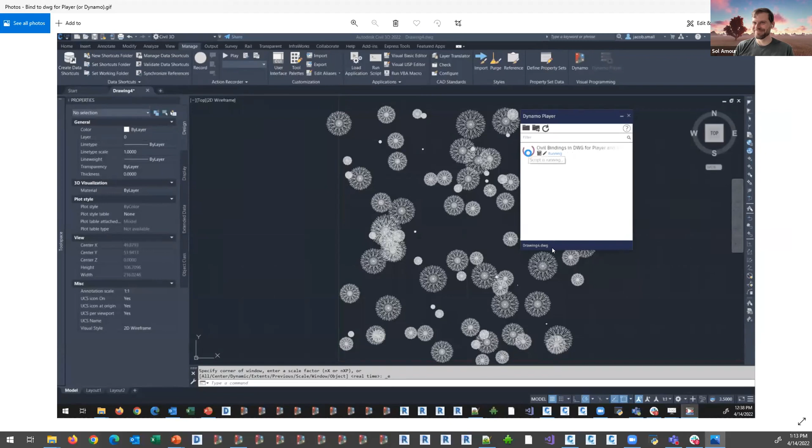So you can see I'm hitting run on that Dynamo Player graph right there, and it's updating the entire piece. This is what I get for copy, paste, replace image instead of copy, paste, and resize. In any case, every time I hit play, I'm getting a new set of trees in this animation. And that's because, again, the session trace data is being stored into the DWG so that we have access to it as the files may update.

This is really handy if you're ever going to automate creation of elements based on an external data set. Maybe you've got a CSV that has station offset elevation coordinates relative to your alignment that you're going to use to place all the utility lines. And then guess what? The spacing on those has to change. Well, we now have to change everything, right? Well, no, we just need to run that same DYN and get revised content, which is pretty cool. All right, back over to the PowerPoint and on to Sol.

All righty, thanks, Jacob, appreciate that.

And one clarifying point, Jacob mentioned two terms, element binding and session trace data. They are the same thing, essentially. So if you do hear or come across those terms, you can kind of pair them together. So moving on to transactions.

Is this GIF playing? Hopefully it is, maybe it's not. But basically, transactions are a way for the program, in this case, Civil 3D, to record actions taken inside of Dynamo. So transactions actually occur across all of the other features that you use inside of Civil 3D as well. But in the case of Dynamo, there's a couple of specific behaviors that exist.

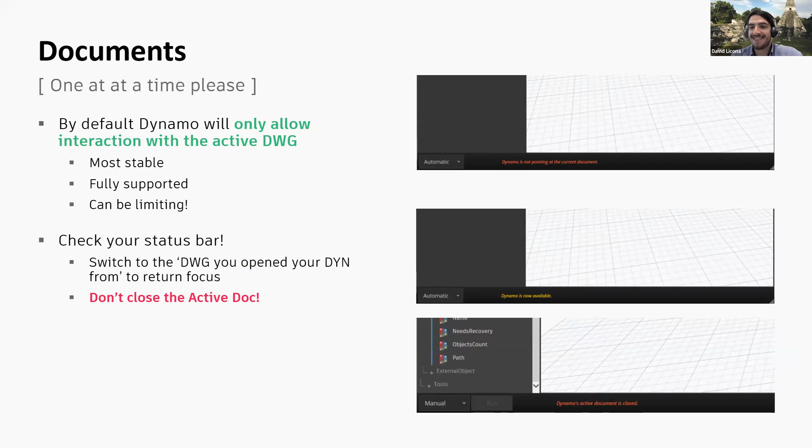You're on mute, Jacob. On mute, of course, because I'm having some technical difficulties. I muted myself and then forgot to unmute myself. Any case, we're here now.

Documents, one at a time, please. So by default, Dynamo for Civil 3D will only allow interacting with the active DWG. This is the most stable. It is fully supported. However, this can be a little bit limiting, right?

We all know that it's quite often the case that we want to modify more than one thing at a time. It's very common that we have multiple DWGs involved in a project. It's actually pretty rare that you would have one DWG for that entire tech stack, right? So if at any point you find you are locked up, you may want to check your status bar.

I've put a few of the more common messages related to document issues down there in the bottom. You can see down there on the right hand side. So this first message, Dynamo is not pointing at the current document. When you launch Dynamo, it associates that Dynamo session to that DWG, right? That Dynamo graph, that DYN, needs to be able to see that DWG as the active DWG in order to be able to do pretty much anything, even execute.

You can't even close that DYN once you start pointing at the wrong thing. To fix it, tab back into that previously launched DWG. Don't close that active doc though, because if you do, you're going to have to open it back up from scratch. You're going to get that grayed out run button that you see down there at the lower right-hand corner, where you're just going to be pretty much locked out. So keep that in mind.

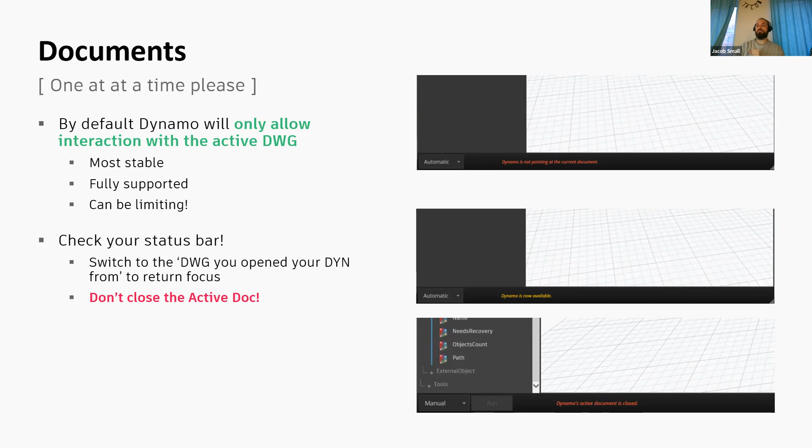Now, this is all sort of as designed, but that doesn't mean you are limited to only being able to work on those DWGs that you have open. This next slide, if my content is working, there we go, does show that it is possible to actually work with other DWG content. This is enabled by the Camber package right now. It's got some amazing nodes for background processing DWGs. Shout out to Zachary Jensen, who's the Camber package author, for providing this.

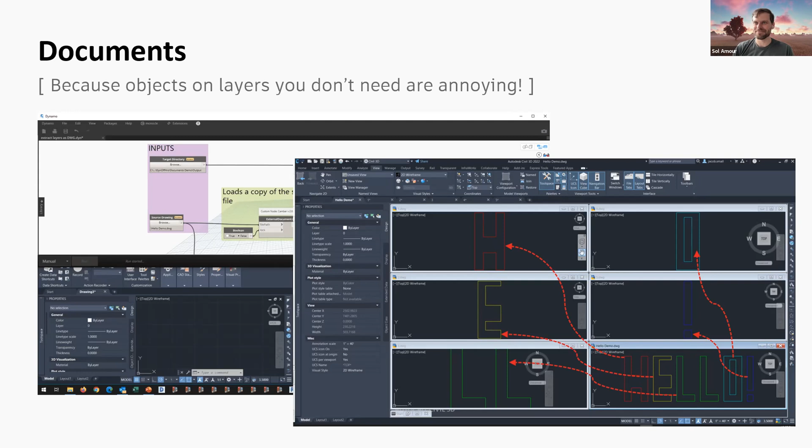Definitely room to improve in the future. We can look to try and improve the situation to get somewhat what you're looking for, Piotr, but that's the current state as it stands today. Great questions, by the way, both of those.

All right, so on to the next one. Yeah. Objects that update automatically. Awesome. So this is just a singular slide. It's kind of illustrating a little bit of a point around how Dynamo and Civil 3D operate together. So it's around these notions of listening and responding and updating to stuff. So Dynamo for Civil 3D listens for changes in the underlying document of Civil 3D through this thing called events. So when things happen, it's an event, and when that event happens, Dynamo listens to it, and then Dynamo can react and update AutoCAD objects.

So this is similar to some of the behavior in Dynamo for Revit. There's a handful of different nodes that will be listening to these changes in the background document, and that will automatically update irrespective of whether or not you click run on the graph. So there's a word of caution here: depending on each node's implementation, behavior can be a little inconsistent. So it's just more of an FYI so that you're aware that if something goes a bit funny, this is probably the action that has been taken in the background.

So one way to mitigate the issues that arise from this is it's always safest to run the graph manually as opposed to in automatic mode, because you do not inadvertently pull in any changes you did not want before you know what is going on. Caveat there, though, is I personally always play in automatic mode and just deal with the consequences if they arise. I find it a little bit more fun.

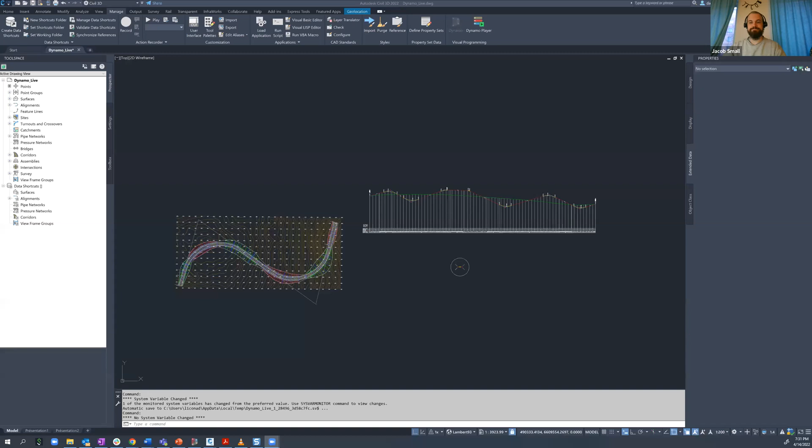Well, with that, that's the end of the slide deck. We're doing pretty good on time. David, that means you're up. I'm going to go ahead and stop my screen share so you can pick up with your demo. Yeah. So is my screen up there, all right? Yes. Cool.

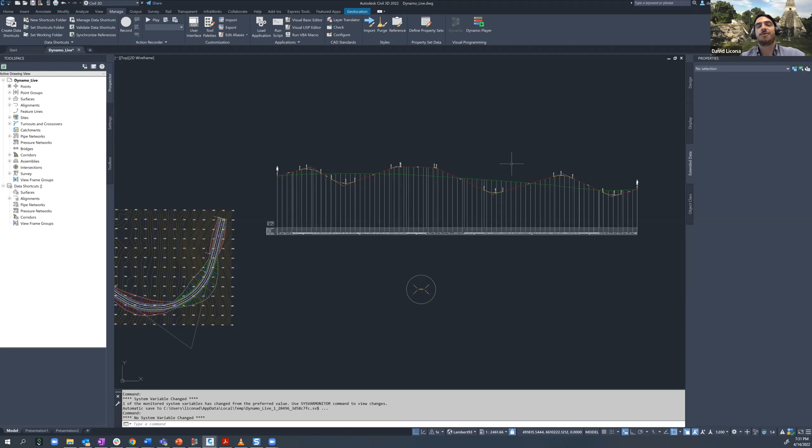Okay, so I have a really small file, and I tend to do this a lot. So this is my advice: have some test files where you can test stuff that are not huge projects. Start with a simple file, and this is what I have here. So I have a corridor. I did an exaggerated profile for the corridor here, just to have some cut and fill that we will be able to see easily. It actually looks like a road back in Guatemala, I think.

But anyway, what we'll be doing here is creating earthwork solids. This is actually a workflow I worked with, and I've seen a lot of interest around it. And afterwards, if we have some time, we'll see how to add some property sets. We have this property set already defined here that is called DynamoRules, right? So I'll jump into Dynamo.

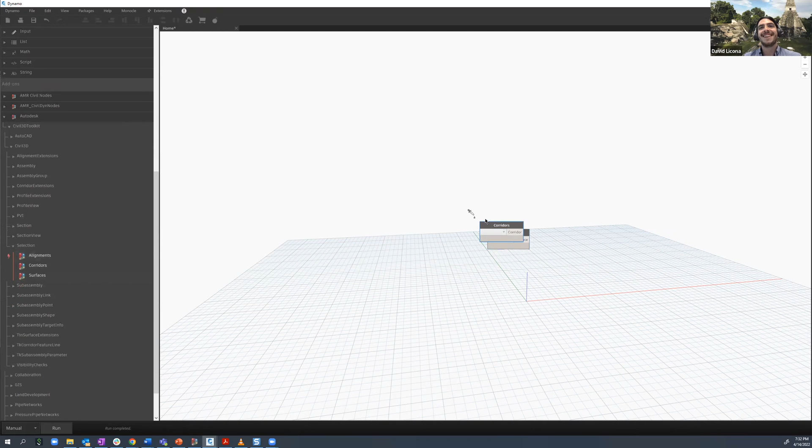Okay, so we'll start by selecting stuff from Civil 3D objects. I'll start with the Civil 3D Toolkit. In the Civil 3D Toolkit, you have some selection nodes here, and these are really great. Actually, Paolo built them. He added them to the Civil 3D Toolkit after I requested it for this specific workflow.

So I'll be selecting two surfaces. First, the EG, the existing ground, right? And I'll be copying and adding another, which is the project surface. So we'll be creating these solid objects between them. We have a surface extension node here that allows us to create the solids.

It's not this one. I always get confused. It's create solids at surface. Yeah. So we will take two surfaces and we'll be creating those solids between them. And this is really useful because if you know Civil 3D, you know that earthworks are only represented as surfaces. So afterwards, it gets complicated if you're going to do some BIM 4D or BIM 5D, for example.

So I'll just plug in. Sorry, I have some problem here. I lost my mouse. Yeah.

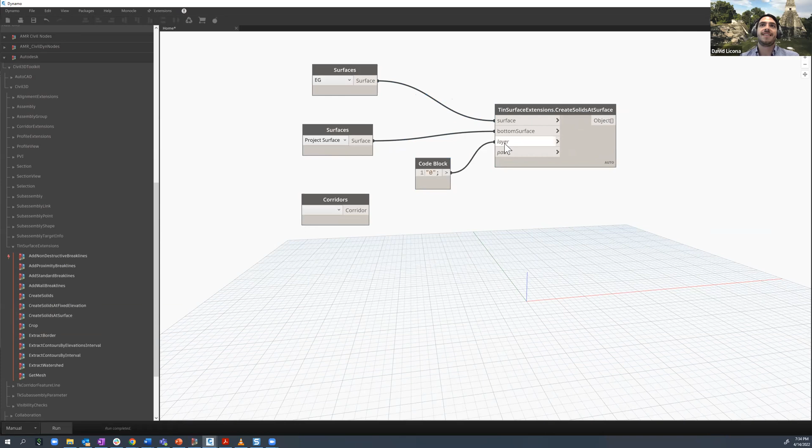Okay, and then I'll add these to layer 0 because afterwards I'll be deleting them, and you'll see why. So if you see here on the output, it will be creating objects. So it will be creating something directly on Civil 3D and not in the Dynamo space. Okay. So if I run it, it will take some time. You think nothing happens, but I have my solids here.

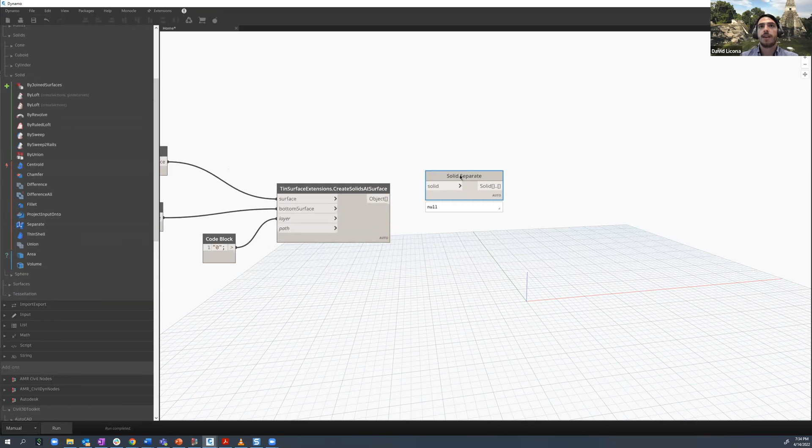Okay, and by default, what it's creating is one solid for the cut and one solid for the fill. So we'll be seeing how to split those. Okay, so this is something really cool in Dynamo. You have the geometry on the solids. You have some, I don't know the name, so that's why I'm searching here. Separate, yeah. So we can separate solids into individual solids if they are not joined together.

So this is what I'll be doing next. Okay, so just separating those solids. I'll run this. Oh yeah, sorry. I need to bring it before to the Dynamo space. I'm really sorry about that. So I'll take the object geometry. Okay, yeah. So this Civil 3D object, I need to bring it to Dynamo space to start splitting all my solids, right? So no big mistake here. Live demo. So there goes.

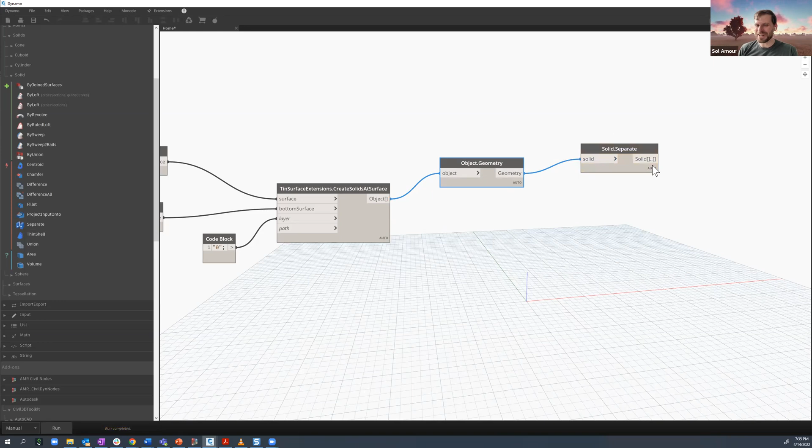Yeah. So as you can see, there are tons of solids created. And why is this? It's because sometimes here, when it's tying up, it's changing into cut and fill. So we will have these tiny lumps of solids that we don't really need. Okay, so we'll just inspect this with the solid volume.

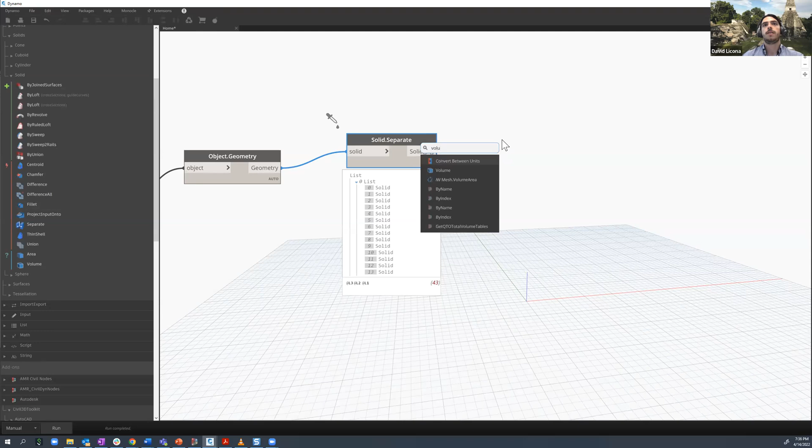And tell me how I'm on time, okay, guys, because... Plenty, so plenty of time.

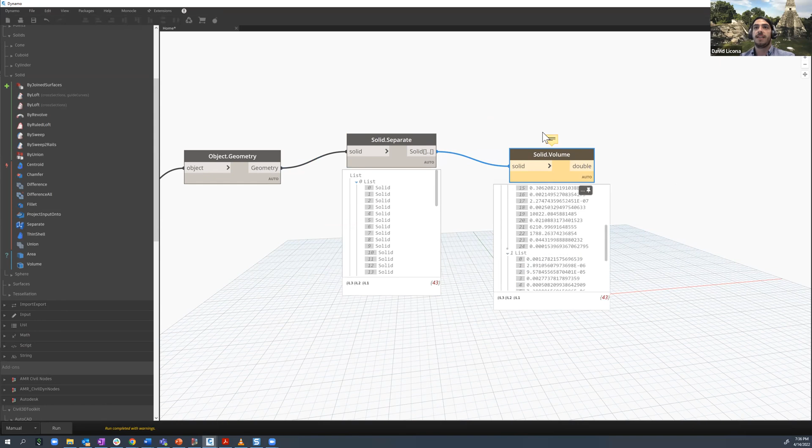Take your time. Okay. So you have really, really small solids that we'll just erase and just take the big ones right here. Okay. So I actually have a negative one, so I have a null here. So we'll take care of this later because it will be problematic with what I want to do. Okay. So now I want to separate them into just these lumps of solids that constitute each of the earthworks, okay? Because normally that is what we will do in a design phase.

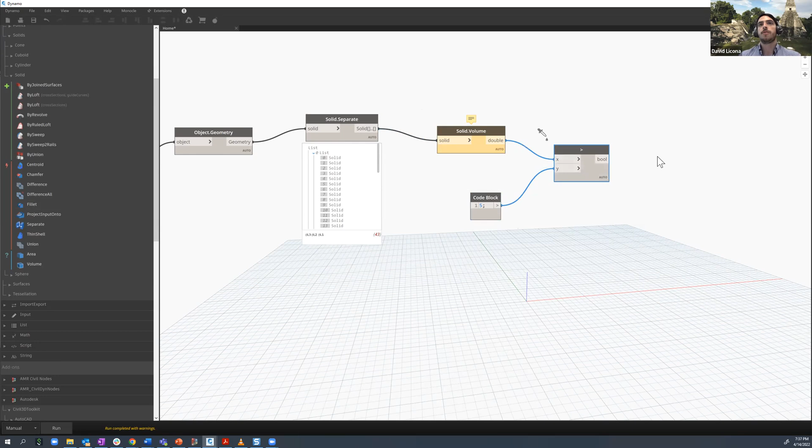So for this, what I will do is just compare, okay? See which of them have a big volume. I'll take 5, it's something arbitrary, 5 square meters, cubic meters, sorry. And let's run this. Okay, so I have the true ones that represent the ones that have the volume that interests me, right? So what I want to do is filter this by a Boolean mask. The thing is, I have the null, right? So let's take care of this.

I will use replace by condition. Okay, I'll add a code block with false here. Okay, so I'll replace the null with false. And then I need my condition, so I'll ask if something is null. Oh, null, sorry. Okay, so if I run it, my null got replaced, right? Okay, cool. So now I can filter by Boolean mask.

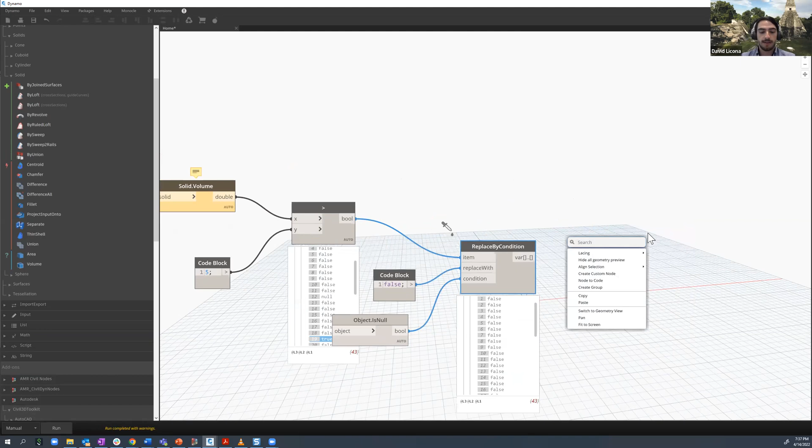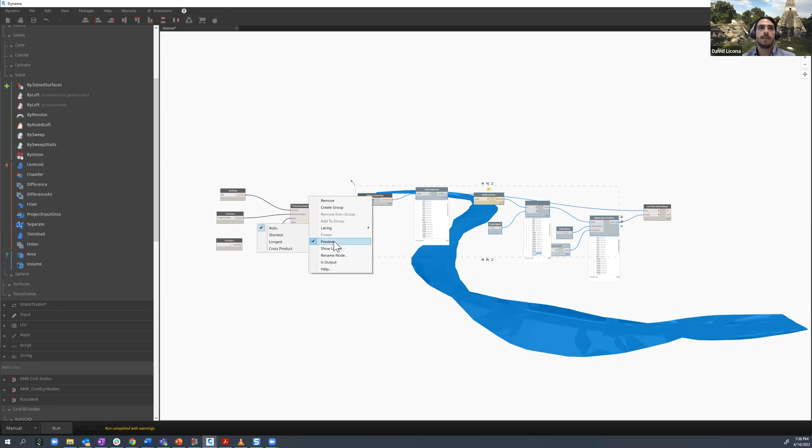And by the way, I haven't shown you these solids, right? So let's go look at them. Okay. Right, so I'm gonna filter this out. I'm just going to take all of these and hide all the geometry preview. Didn't take this one. And now I'm gonna run. Okay, so if I see this,

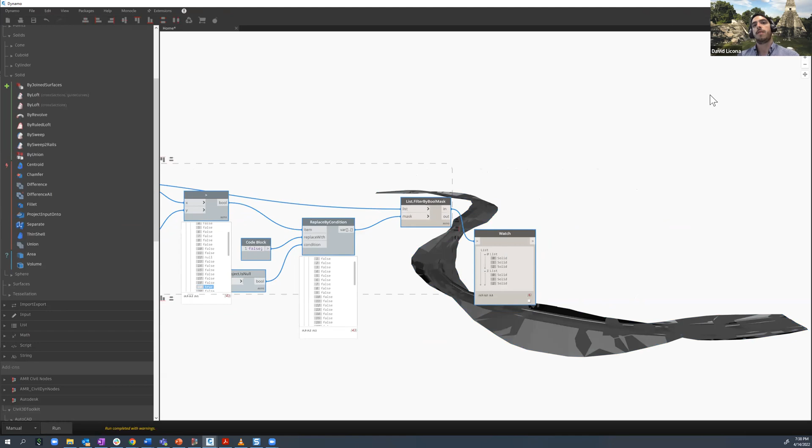I will have only 3 bodies of solid for cut and 3 bodies for fill. So you get first the cut, and then you will get the fill. This is by design, and it's exactly what I had before, right? So if I come here, you will see I have 2 3D solids. Okay, this is normal because of how the first node works.

So if I come here, this node is creating also the solids directly in Civil 3D. So this is why I said we're going to delete them. And what I'm going to do is I'm gonna select these solids, okay?

So I'm creating, I don't know how to explain it really well, but in my workstream I'm going to create this buffer here so that the object geometry is going to execute at the same time. So I get these solids before I delete them afterwards. And afterwards, I'm going to just delete the solids directly in Civil 3D. Because if I delete them directly, maybe I will delete them before getting them into Dynamo, and I don't want that, right?

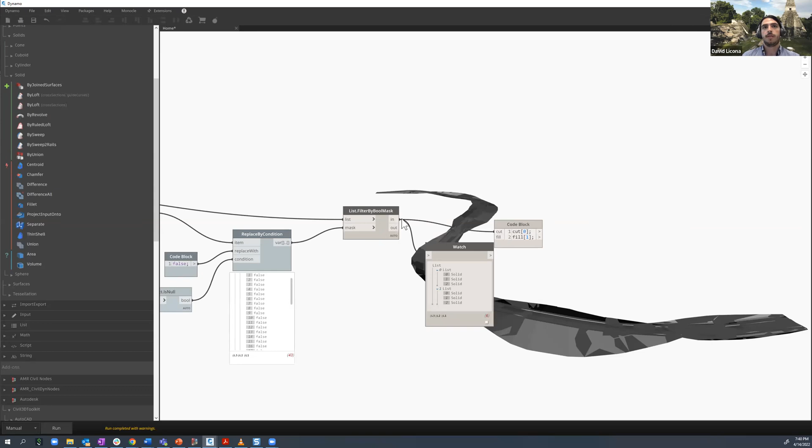Okay, so now I have the solids. I need to send them back to Civil 3D. And what I'm going to do is separate them into cut and into fill, because I'm going to send them to different layers. So it's exactly the same, but first are the cut and then is the fill. Okay, sorry about this.

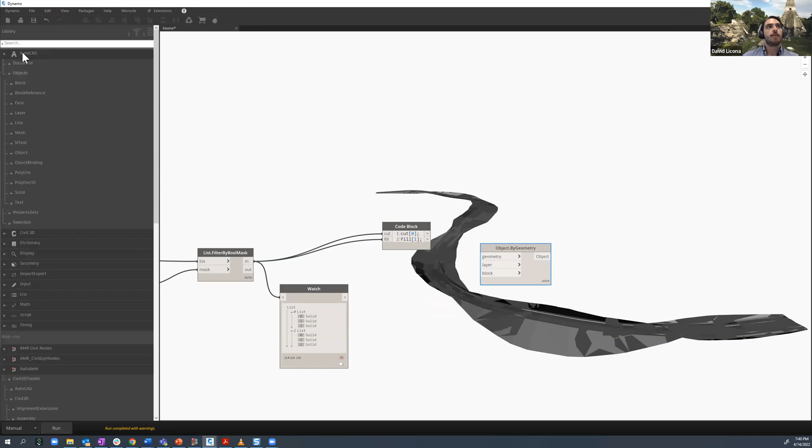Okay, so now to send them, I need the object geometry. So this is in the AutoCAD shelf, object category, by geometry. So you are creating an object in the AutoCAD or Civil 3D session with the geometry that you have in Dynamo. So now I can say this is the cut, for example, and this is the fill. And this is the block I was talking about. So you say block here.

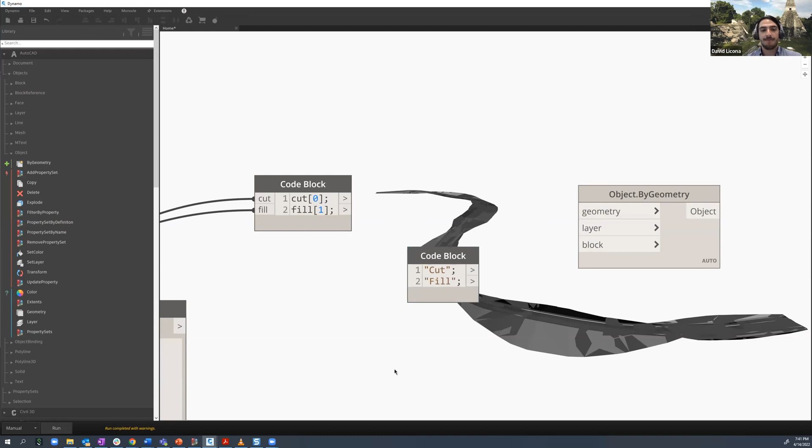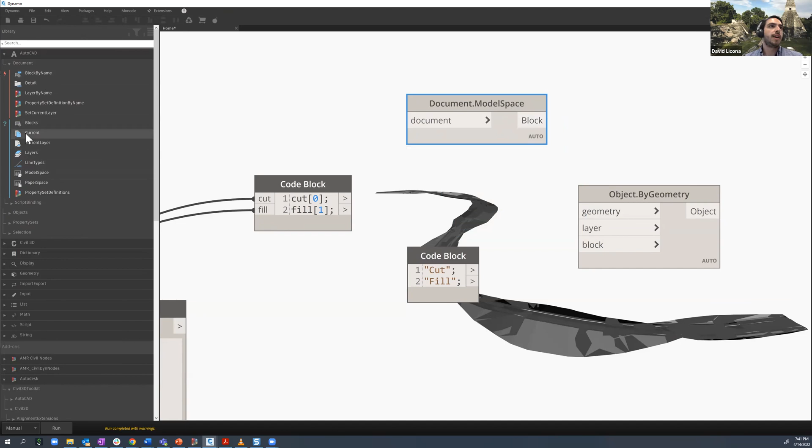What is this asking? So if you go here into the document, remember blocks are part of the document. So we have here the model space. This gives me actually a block because it is a block by definition. It's like that in the API, and that is what is called block here. So I actually need to access my current document first, and then I can get the model space. I'll just send my object by geometry, and I have my cut here.

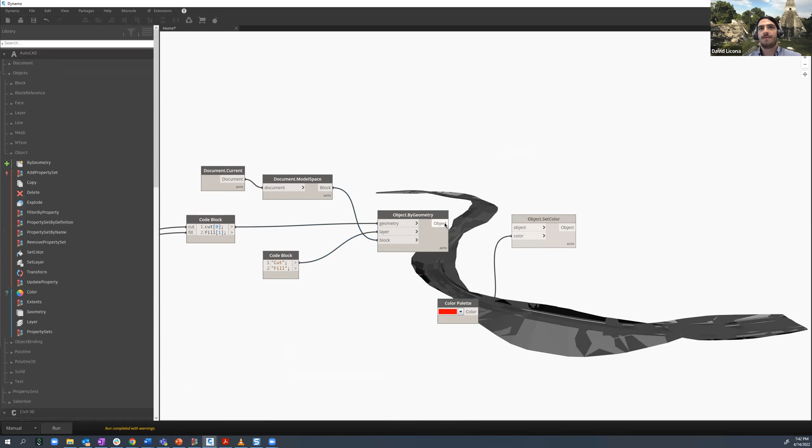And what else can I do? I can set a color, for example, once I have the objects there. So let me go here into AutoCAD, object, set color. And since I'm working with the cut, I'll use some red. Right, so right now I'm just working with the cut. I'm going to continue with that just for time purposes because it's going quickly.

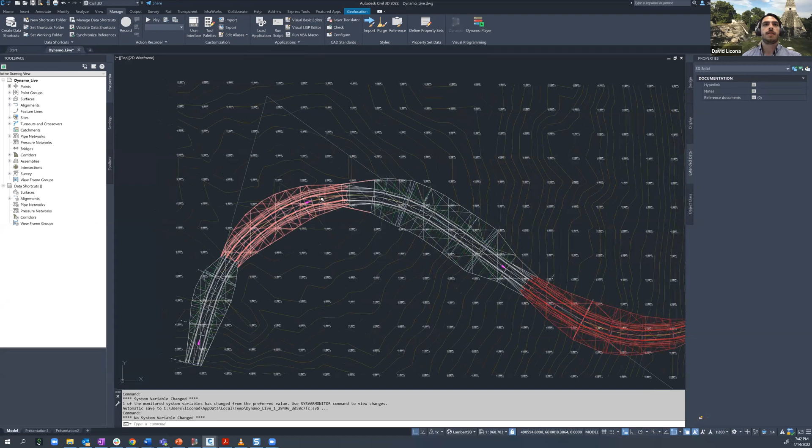So what I'm going to do next is to add some property sets. So I have here my solids. Actually I have other solids before, but I need to erase them. But you can see the red one here, right? And as you can see, there's no property set defined yet. Oh, sorry about that.

Okay, so property sets. It's really important to give information to whatever you are modeling. It's the I in BIM, right? Property sets can be a little bit confusing at the beginning. They are under the AutoCAD shelf. And first you need to get the property set definitions of the document. Sorry, it's not here. I never find them, so I already know them by heart. So it's the property set definitions. Okay, I'm going to get the property set definitions from the document just to see what I have.

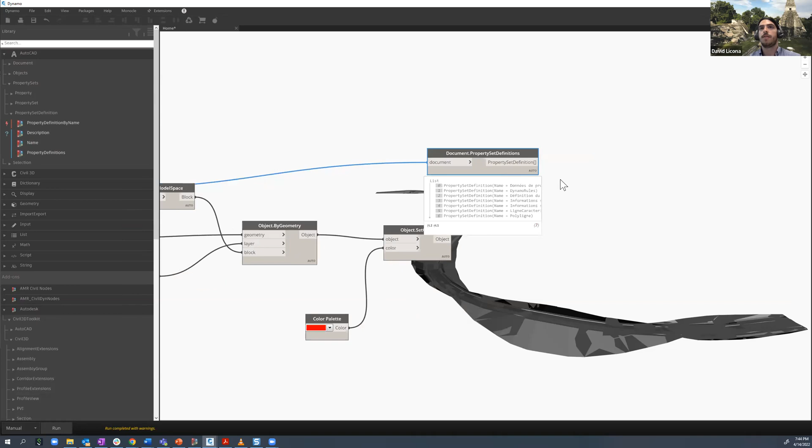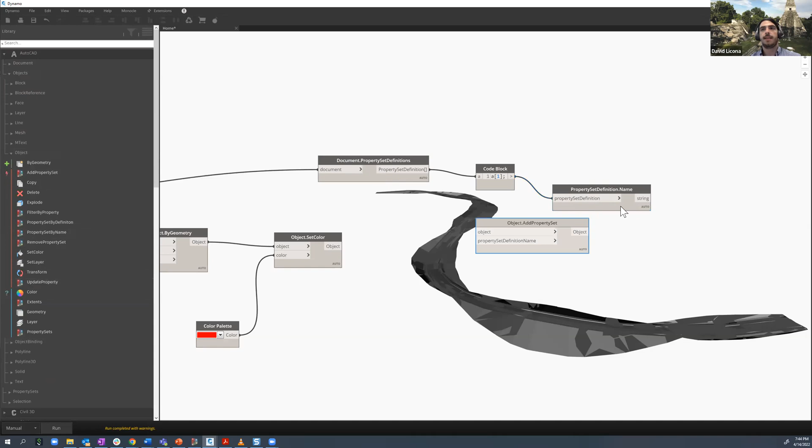I have this one that is the DynamoRules, so it's the first one. I'll just select it like this. Of course, if you're trying to do a scalable Dynamo graph, you will not do it this way. But anyway, I'm going to get this one and get its name, because afterwards here in the objects I have the add property set, that looks for a property set definition name. So I will get the objects that I created and just add the property set definition like this.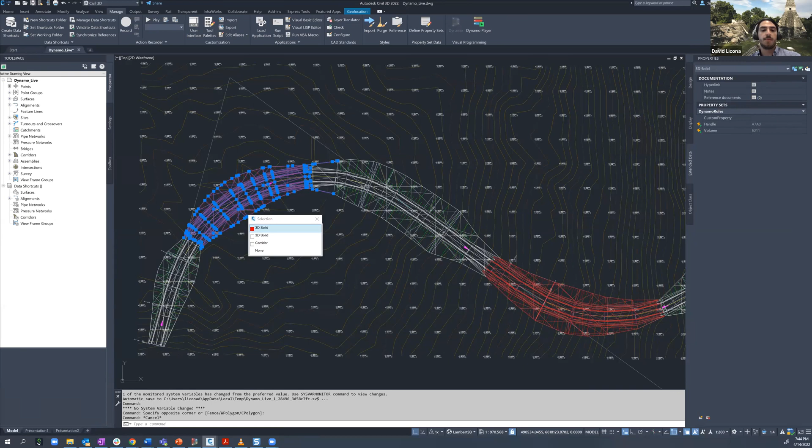Okay, if I come here, I already have my extended data added, and then I can also fill manually the custom property, or I can use Dynamo. But I'm running out of time.

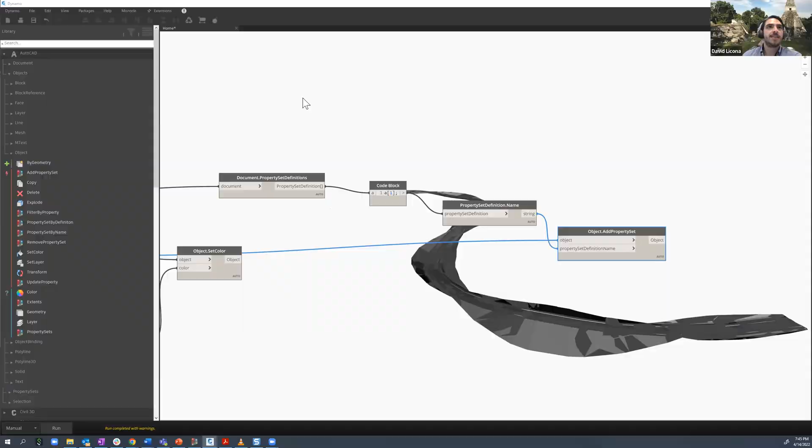So I'll let Jacob continue. Sorry about this. I'm confusing all the tabs, right? So thank you. No worries, David. Great presentation. I'll stop sharing. All right, I'm gonna start sharing all of my screen one.

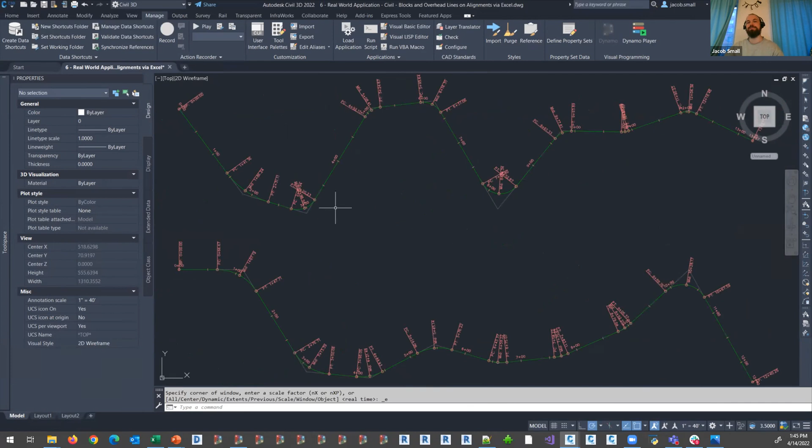We should be seeing Dynamo open. I got a bit of a head start to make sure we had time. Our task is we've got some information with a couple alignments in our project. Your alignments probably don't look like my alignments with no relationship to each other, but this is a common thing for sample data sets. And then we've got some Excel data, right?

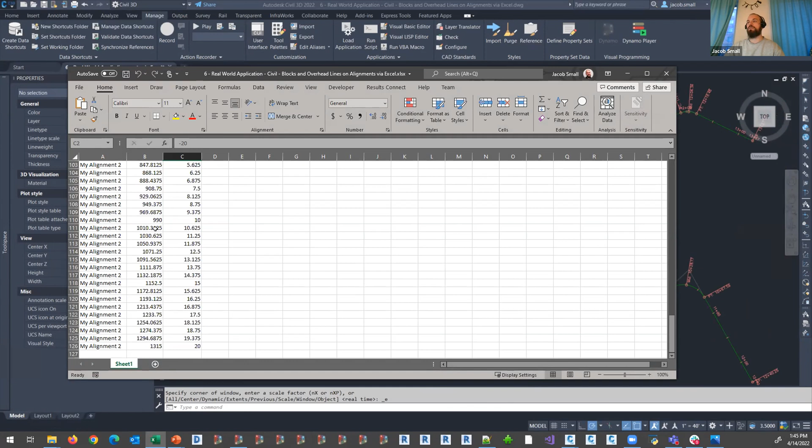Which tells us which alignment and what station and an offset from that alignment that I need for all the power poles in my project, right? So I'm gonna leave that open for now.

So the first thing that we need to do is we need to bring that data into Dynamo. The way I do that is with the Data.ImportExcel node. So that's going to take our file path, turn that into a file, read sheet one, read not as strings, but as numbers, because I want to work with these as numbers. And then also show Excel. In this case, I'm going to say yes, and that's going to make it so that we can see it here. But if I didn't want to see that, I could just go ahead and say no.

I'm then going to use a List.Deconstruct. I've shown this a couple times now in relationship to Excel for you guys, because this is super useful because it pulls that heading out. So now I know what index all my different values are at, right? We're then going to use a List.Transpose node to basically take the entire data set and sort of flip it on its side. So right now we have sort of each row. This way I'm going to have each column, right? So I've got my alignment names first, followed by all of my stations, and then all of my offsets.

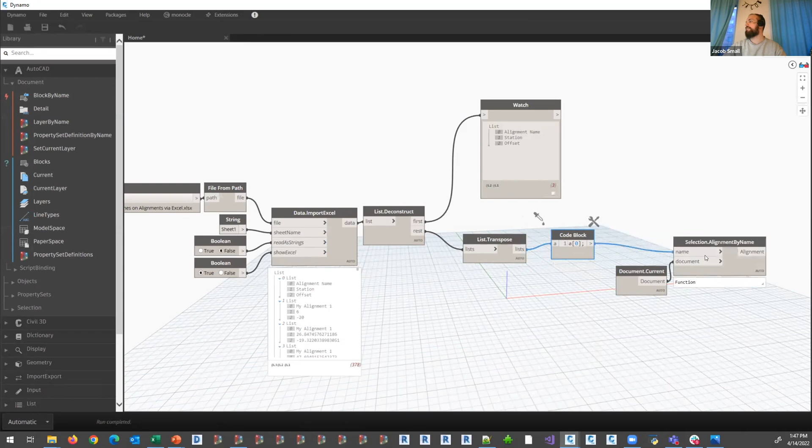From there, we're going to use a Civil 3D Selection Alignment by name node. And this needs an AutoCAD Document.Current input. And it also needs those alignment names. And those alignment names are at index 0. So I'm going to use a quick code block, declare a variable, and then say what index I want to pull that data from. Since I declared the variable and didn't set it to anything, I get an input for A. We'll wire that right in right there. And now I've got all 125 different alignments that I want to work with for all 125 different stations and offsets, right? But we don't yet have the station and offset. I got to sort of pull those pieces over individually.

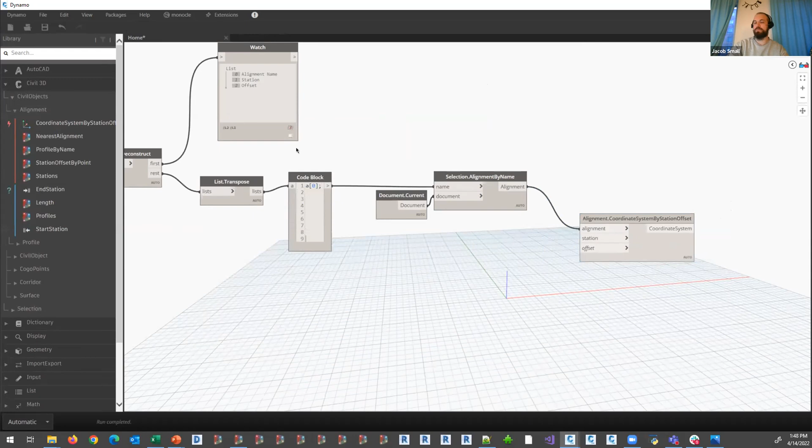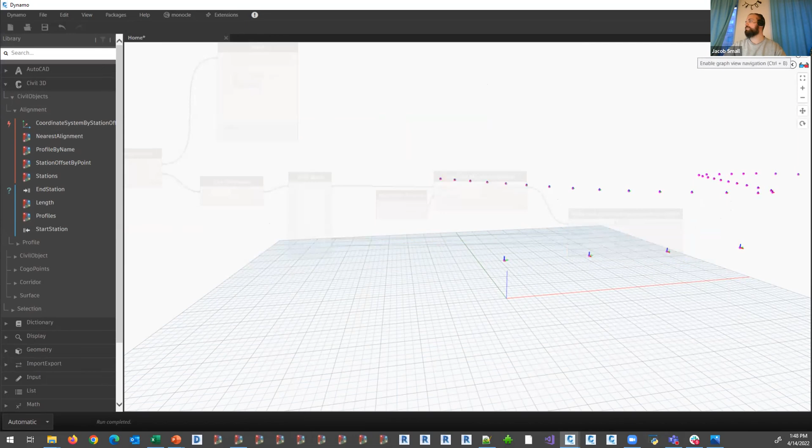And to do that, we're going to go back into the Civil 3D section, Civil Objects, Alignment, and Coordinate System by Station and Offset. So this takes an alignment, a station, which if I think back, those were at index 1. So we'll go down a little bit, give myself a bit of room. A index 1, we've already declared variable A as an input, so it's still there. There's our station. And then we need our offset as well. A index 2 from right up there. And when we wire this in, hey, there we have it. All of our alignments. We'll go back to our 3D geometry view. I'm going to zoom extents. And we can sort of see how those follow along, which is pretty nice.

I'm going to group all my coordinate systems by their alignments, because this is just sort of helter-skelter, and it's going to be really handy to have stuff grouped by alignment here. So let's do a List.GroupByKey. This is going to take our list of coordinate systems, and then I need another list of keys. And once again, we've already got that data, A index 0. So the index 0 of my transpose list. There we go. And now I should have, if I put a watch node on canvas, stuff grouped out by the coordinate systems on alignment A and on alignment B, right? And I'm just letting my index preview sort of show that content over.

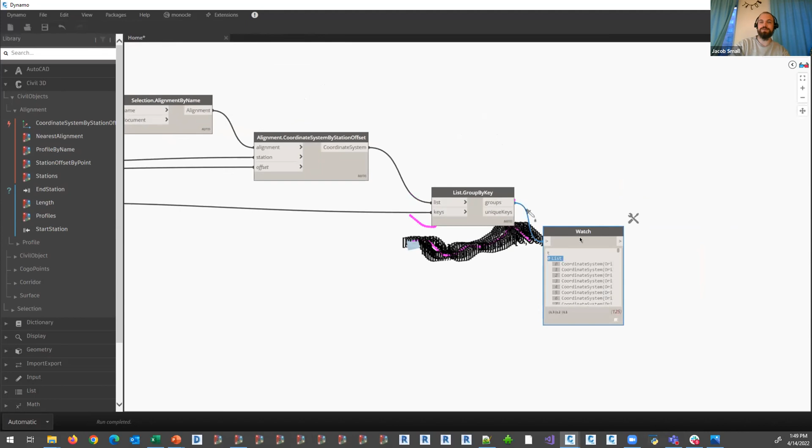My headset's now yelling at me to recharge it. So if I lose audio, I'll switch over to speakerphone, but someone yell at me real quick if that happens. Thank you, Sol and company, who I know will take care of that for me.

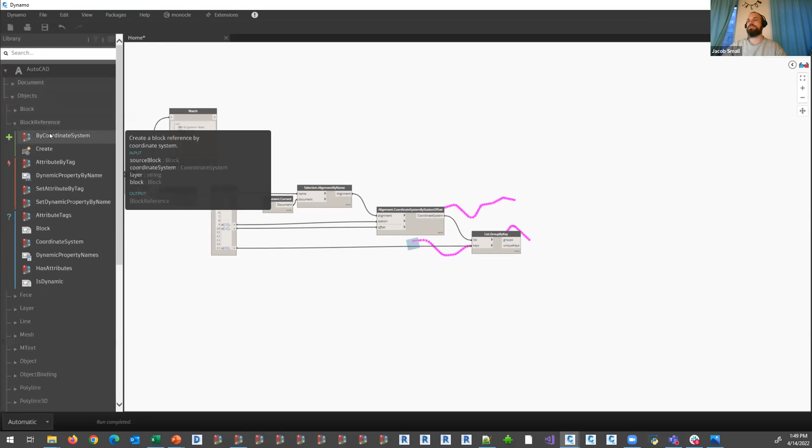All right, so now from here, we've got all these different elements. Let's go ahead and go into AutoCAD. I'm gonna say objects, BlockReference by coordinate system, because I've got my coordinate systems here. I need a layer. I'm gonna put these on just the layer power pole. You probably want to put it on something a bit more common sense than that. And then I'm going to go ahead and copy over Document.Current. And I also need from my document my model space to tell it to put this in the right place. And then last but not least, I need a block. And we're going to get a block from that active document with the name power pole.

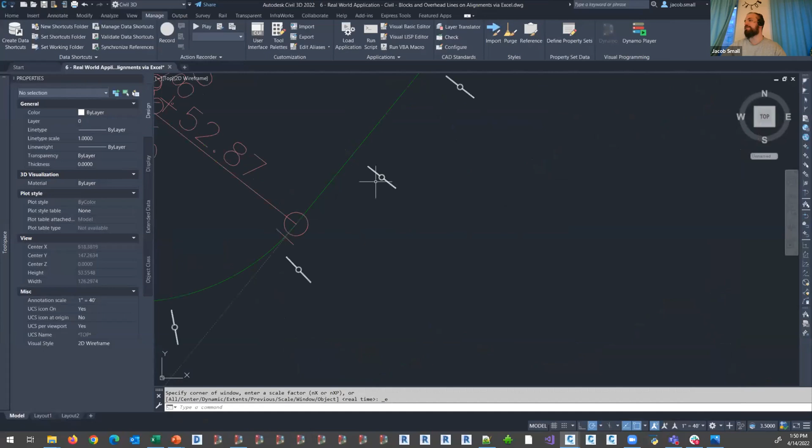That pulls out my block. Notice I'm doing all this in automatic run mode because, like Sol, I like to live dangerously. There are 125 block references now added into the document, and you can see those have all been added in with their correct station and offset from one end to the other, right? And that's basically a super useful thing to be able to quickly do.

And we can take this a step further with the 10 minutes that we've got left. I'm now going to take each one of those and we're going to make the overhead wires that string between each one of these pieces, because these are 3D blocks. If I go up to my 3D view. So why don't we actually work with these as 3D elements, huh?

All right, so the first thing that we need to do there is figure out what the attachment points are relative to the power pole's location. And I just happen to have this information memorized based on the fact that I've done this with this particular block fairly recently, maybe earlier this morning. So from -2.5 to 2.5, I'm gonna step four times. And we're gonna have some values vertically of 19.25 and 18.25.

And I'm going to use these to create a point by coordinates with XYZ values. And I'm going to make these points at my origin, and that's okay. So there's my X values, there's my Y values, but my list structure doesn't quite work out the way that I'd want it to, right? I'd really want something that had all those points.

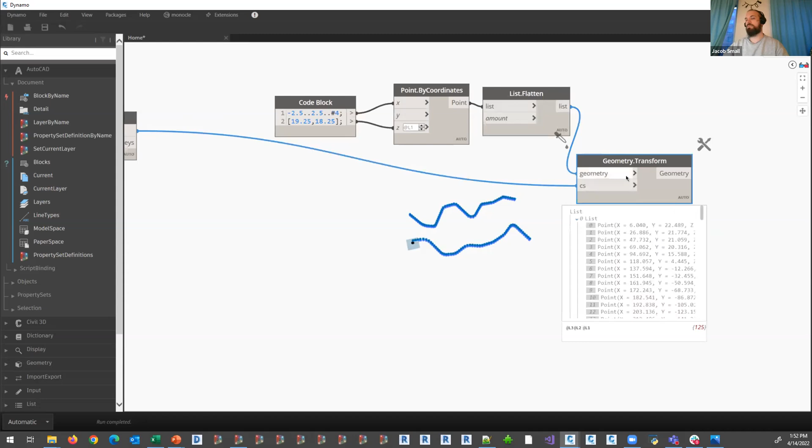And then I'm gonna use a Geometry.Transform. And this is going to take any geometry, in this case a bunch of points, and allow us to transform it into any coordinate system. And I've only got 125. Why is that? Well, lacing, right? We want to work with these elements at level 1 so that I work with all that content. So there's my 8 at each piece.

I'm going to set this back to 2 just in the interest of processing power. I'm hitting a high number there in terms of number of points that are made. And now that I've got that content, we can start to work with it as we would regular Dynamo elements. So List.Transpose is going to take our rows and turn them into columns, or columns into rows. There we have all 500. And then from here, we're going to do a PolyCurve by points.

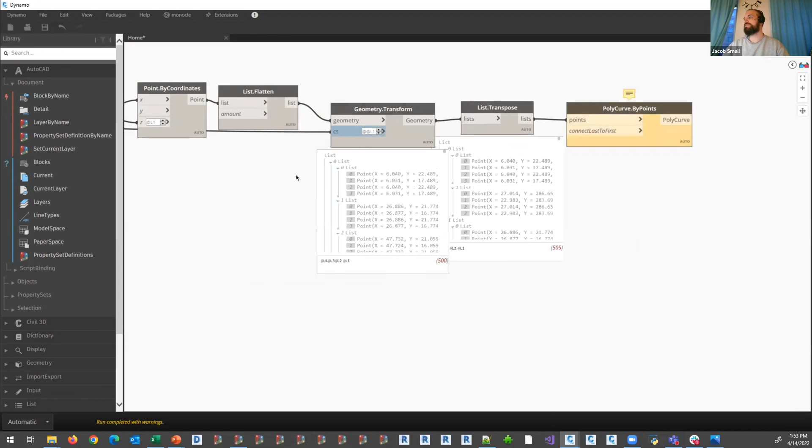And what do we have happening? Well, it looks like we didn't say, let's keep our list structure. Now we get all of our points, but hey, we didn't transpose at the right level. And now we've got 2 polycurves, right? Or sorry, 4 polycurves, 1 for each set of lines.

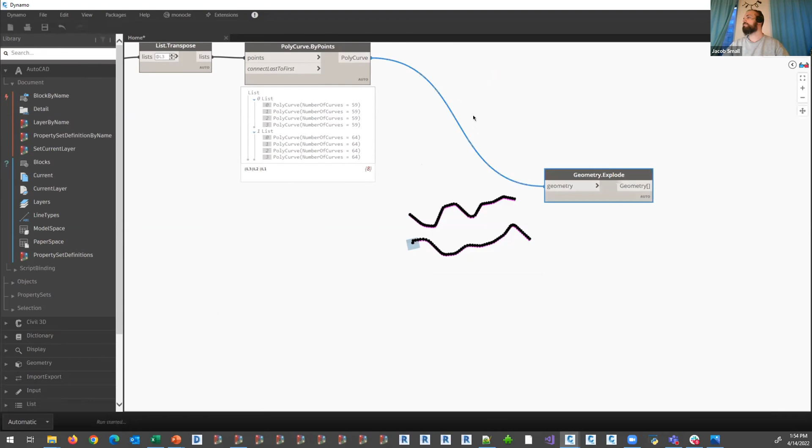So you can see there, when I select this group, all of those indices are down there. We didn't select any at the upper end. And if I select that one, all the indices on the upper end. So I still have the content set up as it needs to go. So from now, we're going to go ahead and do a Geometry.Explode. And now I've got individual lines set at individual levels. We're going to break these down.

So breaking those down into the individual curves, the next piece is going to be to find the start, end, and middle. Curve.PointAtParameter for each one of these pieces. We're going to say parameter from 0 to 1 3 times: 0, 1/2, and 1. And we need to set, once again, our list levels to get this to work. We're going to use level 2 and level 1.

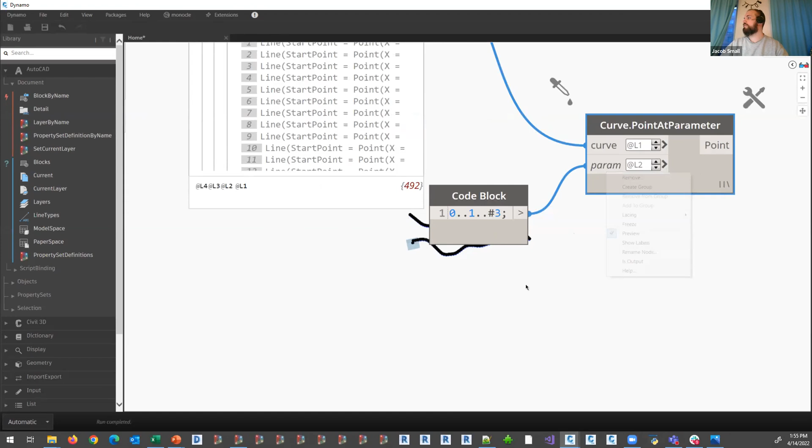And then set our lacing to longest. And that should give me a whole lot of points, 1,476 points. So that number does align to what my notes said it should align to. So now I can do a Geometry.Translate, take our points. Our Z is going to be what we translate by, and we're going to go 0, -1, and 0.

And again, we've got to play with our lacing because we want to work with everything at level 2 and everything here at level 2 to give us the right number. Arc by best fit through points. Here's our list of points. And then from there, with our arc by best fit through points, we can do an Object.ByGeometry, which I believe is in the Civil 3D Toolkit.

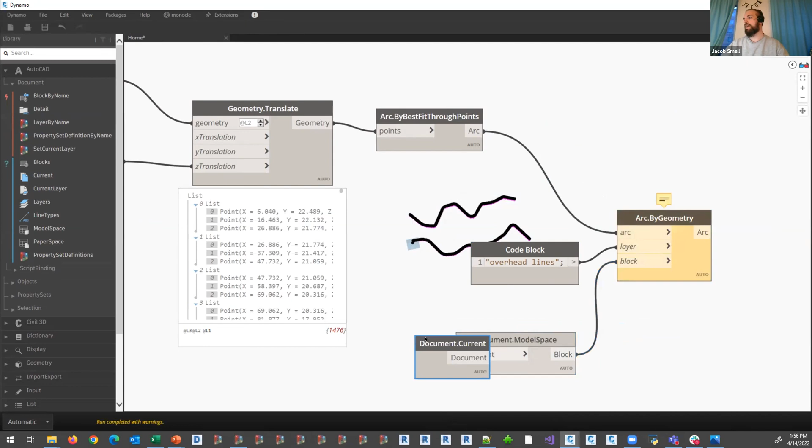I'm going to put this on layer overhead lines. And the block will be model space, which needs our current document. And when this wires in, hopefully nothing crashes. There we go. And there are my overhead lines added in.

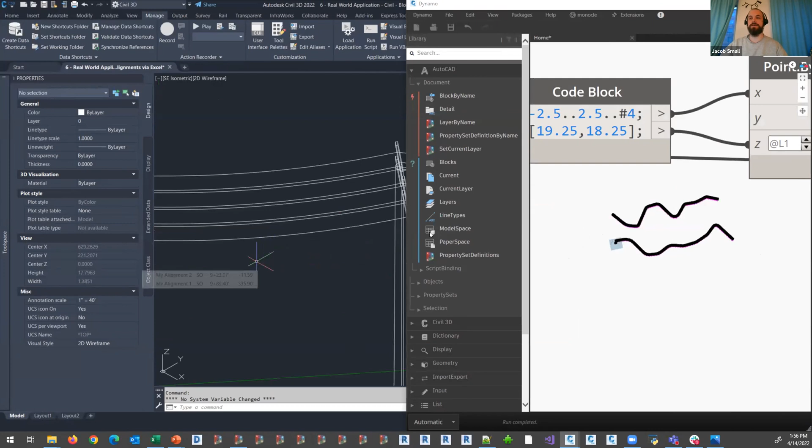Now, we said before, what if I wanted 4 overhead wires instead of 2? That was pretty simple to change that out, right? So we could actually set this as an input into that piece and then automate the creation of all of those elements. All right, so that was that demo.

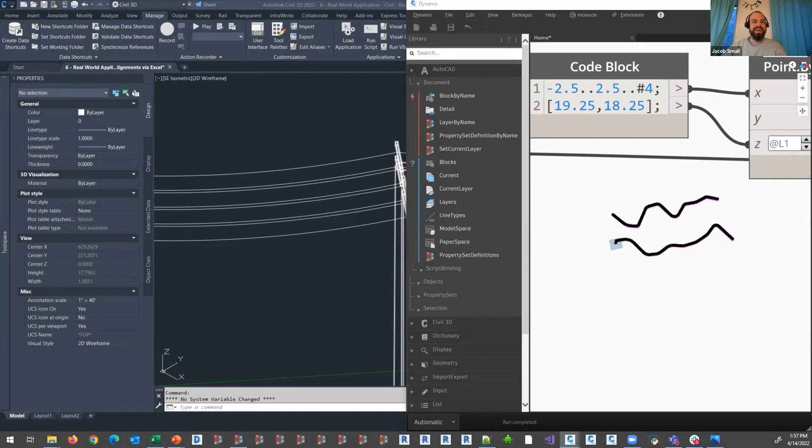And I saw a couple things popping up in the chat about the speaker to 11. Yeah. Yeah, referring to living dangerously with automatic run mode.